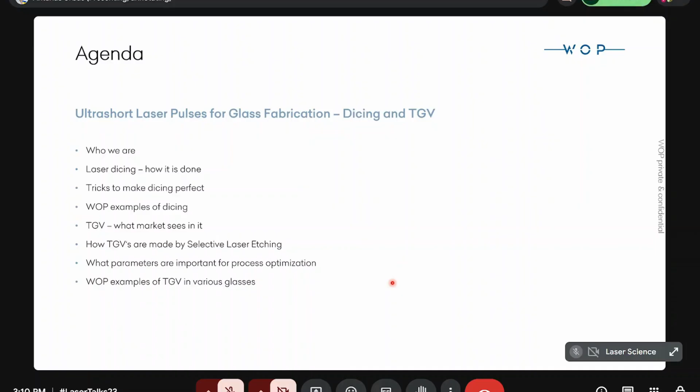TGV, why the market is keen to introduce through glass vias, and why it is important. Just briefly to present how these are made by selective laser etching, because it is the most popular way of doing it these days. What parameters are important for process optimization, and again WOP examples of TGV in various glasses.

So briefly, who we are. As was already presented, we have been working more than 20 years in the field of femtosecond laser micromachining, developing processes and machines which implement these processes. And why femtosecond? It is a very simple answer. No material can withstand a femtosecond laser pulse. We have several patent families. We are roughly 50 professionals, some PhDs, most are Master or Bachelor of Science. And we not only make machines, but also continuously work on research and development together with scientific institutions we are in close contact with.

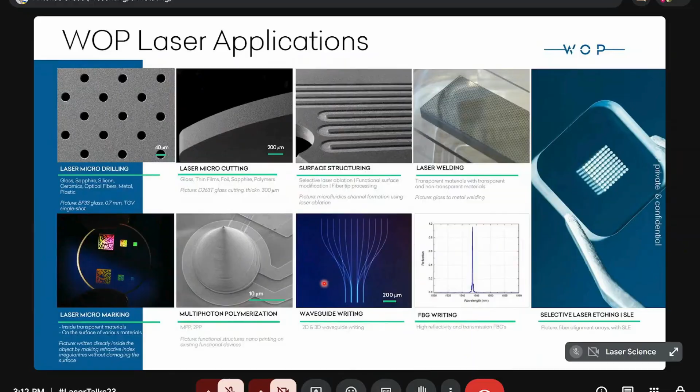What laser applications can we consider? So we are very strong in laser micro drilling, which can be applied to transparent media like glass, sapphire, silicon in this transparency window, ceramics, optical fibers, metal, plastics, whatever. Laser micro cutting, surface structuring, laser welding, laser micromarking, multiphoton polymerization, waveguide writing in 3D shape, and fiber Bragg grating writing.

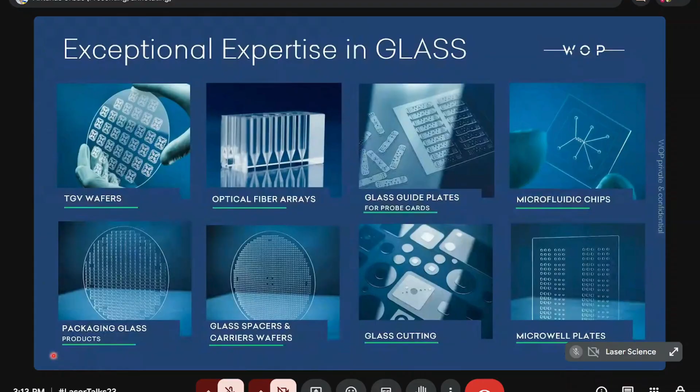As it was mentioned, we have quite big expertise in glass fabrication. So our most recent focus is through glass vias on wafer and panel size. A very popular and demanded thing is optical fiber arrays for positioning fibers in mixed electro-optical devices. We also provide glass guide plates for probe cards, microfluidic chips, packaging glass products, glass spacers, carrier wafers, glass ceramics and whatever cutting, and microwell plates. So it's plenty of applications, we have to say.

Then let's go to our topic. I'll start from dicing. What does glass laser dicing mean? First of all, if we have mechanical dicing by means of diamond blade or diamond wire, it makes quite a wide kerf, which means material loss and quite a high value of chipping on the edges of the kerf.

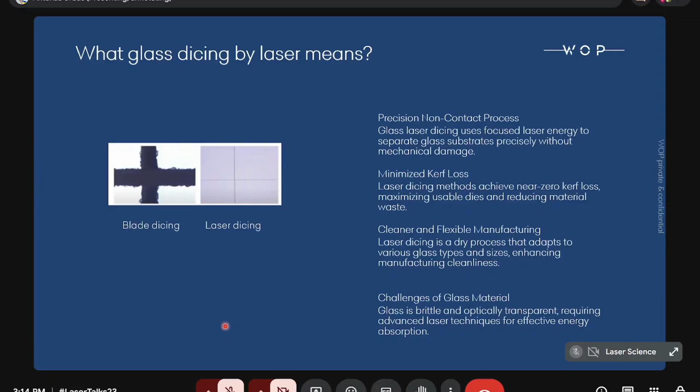Meanwhile, laser dicing, and I have to mention that both these photographs are made with the same magnification, so you can see that it is much more precise and clean. As it is a non-contact process, there's no contamination with debris. It's clean and flexible manufacturing. As you can see, it is a very, very small kerf, meaning you almost lose no material. But of course, if you deal with glass, you have to be careful, taking into account glass material features.

How does it usually happen? Going from the right side to the left side, glass can be separated by ablation from the top side or from the back side. Each of these methods has its advantages and disadvantages, but the main thing in this ablation approach is that you have removed material, which means that there are plenty of particles flying around and settling on the surfaces, and you have to clean it afterwards.

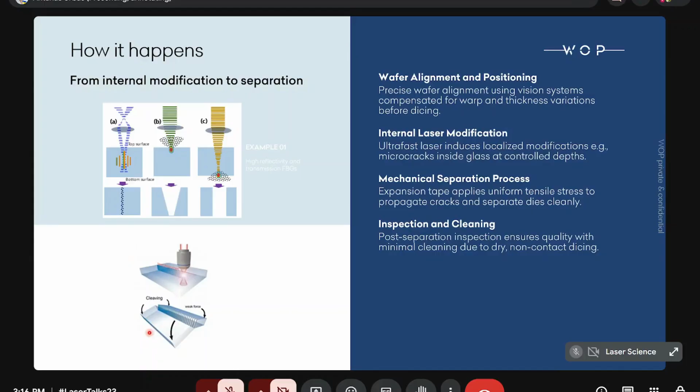If you make this scribing or dicing, whatever you call it, you make a modification in the glass material, and then adding mechanical force, be it bending on a sharp edge or stretch tape, you simply mechanically separate your material along these dicing lines. So again, here you can see the main stages of laser dicing. One thing is to place it very precisely according to the drawing you have. You make internal laser modification and then separate it mechanically.

What are the most popular and most efficient methods to induce modifications for dicing? A quite old method is stealth dicing, as Hamamatsu calls it, which is used by the Disco company. So you introduce damages inside the glass. If it is a thick workpiece, you place multiple scans, and then you simply break along this line.

You can do it in one go in quite big thickness if you use the effect which is called filamentation; it is patented by Rofin-Sinar. What is filamentation? It is a combination of plasma defocusing of the beam, which is focused inside, and the Kerr effect focusing it again. So here you should have many passes to get several damage lines. In a filament, it is made automatically. It is focused, defocused, focused again, defocused again, focused again, and you have a filament, a chain of modifications along the focus line. So it is quite precise, and again you can break after one single scan.

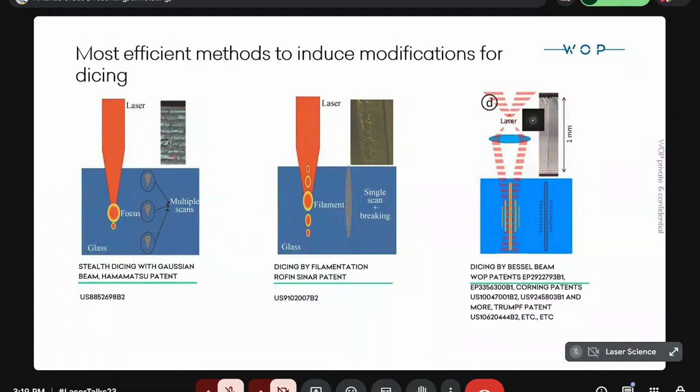Corning has plenty of patents, Trumpf, whoever. Many companies were working on it, and I think it started in 2000 when it became a very popular approach, and now Corning alone has roughly 120-something patents related to Bessel beam application in glass.

So just to tell those who don't know, and to remind those who know it, how the Bessel beam is arranged. In contrast to a Gaussian beam, where the parallel, collimated beam is focused into one single spot, which is very well known, described by the Rayleigh length of the waist and the minimal radius of the focus.

So if you place, instead of a spherical lens, a conical lens, which is popularly called an axicon, it forms a needle, quite a long needle, which can be millimeters, centimeters long, and you just have to adjust its dimensions to your workpiece to get a modification along this line.

So what is important is that this minimum dimension of the Bessel beam is 3-4 times less than you can achieve with the same optics in a Gaussian beam. Meaning that it is no big deal to get a 1 micron thick needle to modify the glass. So you are much more precise than you would be with a Gaussian beam focus.

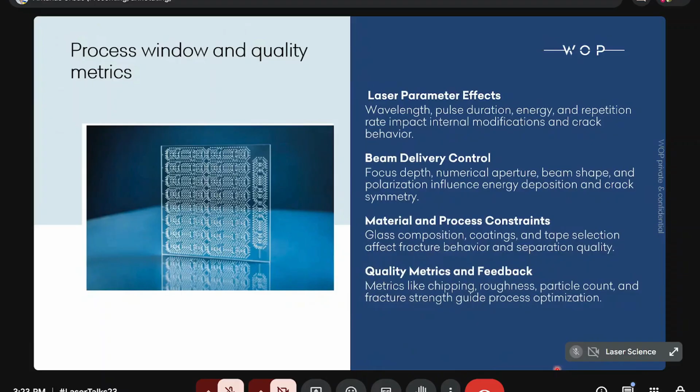As I mentioned, a very important thing is beam shape, which is related to the stress induced in the glass volume. If we place a Bessel beam pulse focus on glass, on the top we can see a very nice, very round spot, which looks very smooth. But if we go a little bit deeper, in this case 200 microns under the top surface, you can see that it is quite irregular, and often it has quite an unpredictable form.

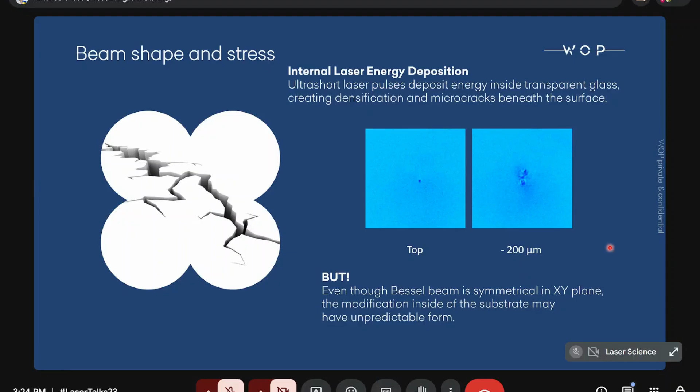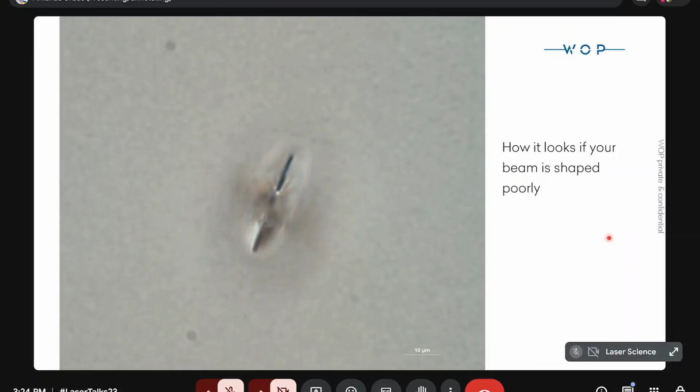And if your beam is shaped poorly, you can see how it looks inside the glass. This video shows you modifications and cracks every 50 microns going down from the top surface. You can see that there are sometimes very well-defined directions of the cracks, but these are not the same at different depths.

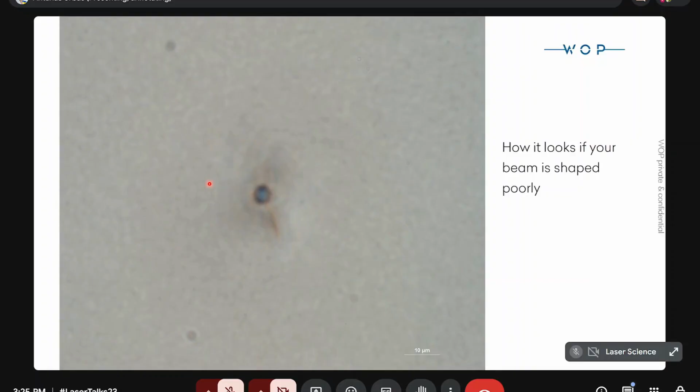And what happens if you try to do dicing with such a badly shaped beam? Surprise, surprise, the cut line cannot be formed because these cracks inside the volume are in very different directions at each spot, and they simply cannot join. This is a line of separate modifications, but no single cutting line.

So what can we do to make the cut line efficient and nice? Again, there are several patents which make this possible. All of them make this modification elongated in the desired direction. It can be done by means of cylindrical optics, by means of phase elements, like in the Corning patent, and we use variable space variant retarders to shape the beam to achieve this elongated form in the damaged area.

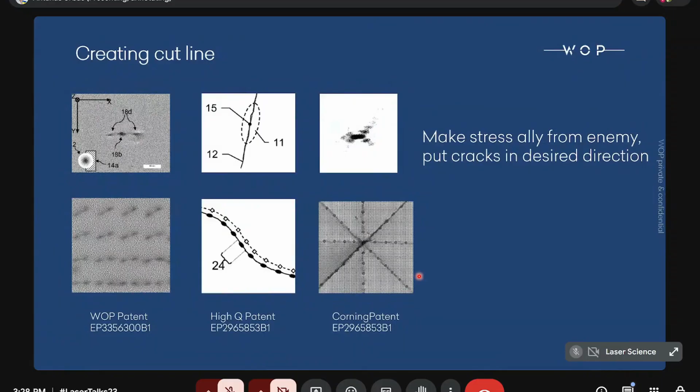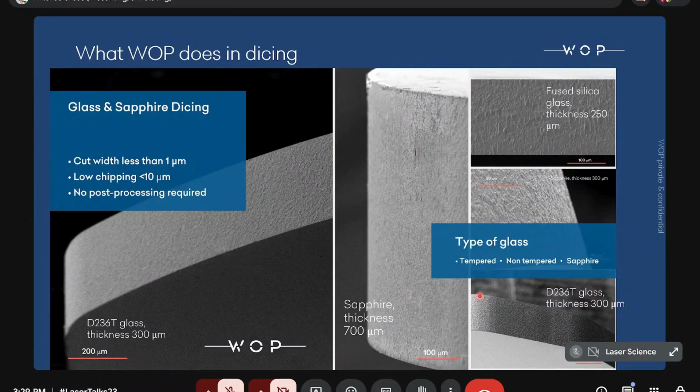Fused silica, again, very nice. Sapphire is not so nice, with a little bit bigger chipping because it is a crystalline material, and the crystal planes pull your cuts a little bit into the material. That's why it is not as clean as glass, but still quite good. And again, our patents relate to tempered, non-tempered glass, sapphire, whatever you want.

And we extended this experience to other materials. The main thing is that the material must be transparent to the laser light. If you remember this forming of the Bessel beam, there are beamlets coming from the cone, from the axicon.

They have to penetrate into material to build this needle, meaning that material must be transparent. So if we work in the transparency window for silicon carbide or coated glass, we can achieve chipping better than 10 microns. Normally it is a couple of microns. We can do it in all shapes, and of course we can tune the dicing process for different thicknesses.

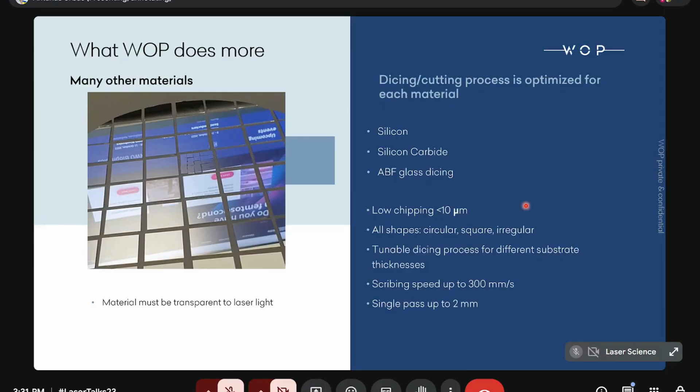Today, we safely work with scribing speed up to 300 millimeters per second, and a single pass can be as deep as 2 millimeters. So, I already saw several questions about dicing, and some answers will come a little bit later. But now, let's go to the second part of our meeting. It is about TGV.

TGV stands for through glass vias. Why it is interesting and where it is expected to be used? So here you can see an ideal view which is created by APECS. It is a European initiative for creating next generation packaging of 3D electronics.

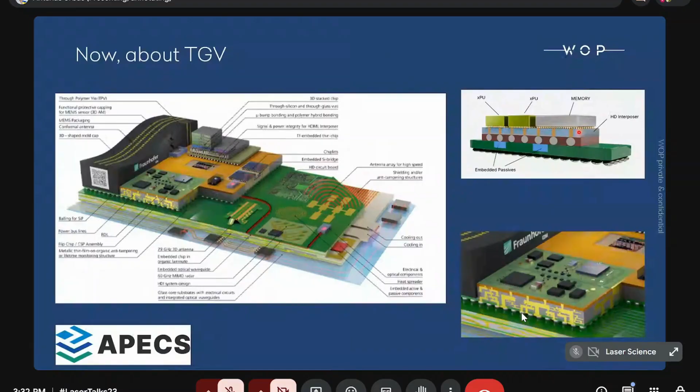So you can see a lot of layers which should be interconnected in the big structures and in the single chip, which is a 3D layered chip, processing unit, memory, and all this connecting to the power and to further elements. And the best interconnect is made through glass, just now.

So again, what is TGV, through glass via? It is an opening in the glass which is filled with conductor, in most cases copper, and it interconnects elements on one side to the other side in the best possible way. So what is it in terms of production? We take glass, we make laser modification, then we go to wet etching. This is the most popular way of creating TGVs in the market today.

Then we check with automated optical inspection and give it to metallization, where a seed layer is set on the surface and inside of the via, and copper is put into the via. Afterwards, of course, it should be removed from surfaces. So we in WOP stop at this stage. We have some kind of optical inspection, which is not really automated.

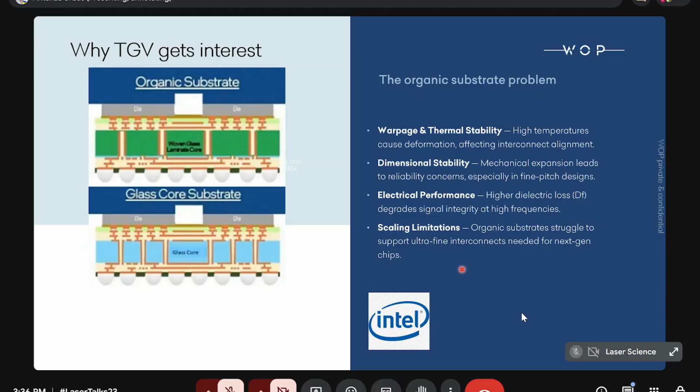Just a small talk about why TGV, why glass. You can see what Intel says about it: organic substrate is not a very flat and not very smooth surface, and it is not very stable in dimensions, because plastic is plastic, you see. And the electric performance is not so good, quite high dielectric losses because of dielectric constants, and it is very well seen at high frequencies, especially talking of 5G and 6G. The loss in the plastic is quite big.

If we use glass instead, what we have is very good flatness of the substrate. It is 100 angstrom, 10 angstrom, whatever you want, just depending on your polishing quality. The electric loss is much lower than in plastic. And you can select glasses which match very well with silicon, meaning that if you place your silicon chip on this glass core substrate, thermal expansion is the same. You don't lose the contact. You don't have bigger electrical losses

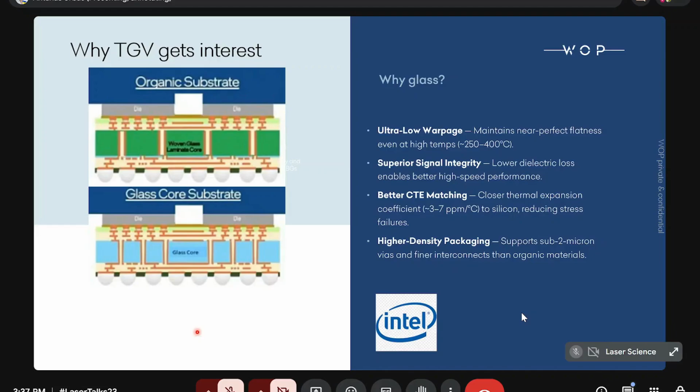in this package. And of course, one very important thing is that glass allows much higher density because of being able to provide a couple of micron wide interconnects between layers.

So if we go to TGV, what is important if you want to go to the market saying, hey, I can make TGV, what will they ask you? As I mentioned, we have to take into account that it will work in the gigahertz range. So the form should be as smooth as possible, meaning that it should be straight, minimal ratio of waist to top and bottom. Top and bottom should be the same. And roundness, perfect is good, but it should be better than 90%. And the roughness of the inner wall should be 150 nanometers or better.

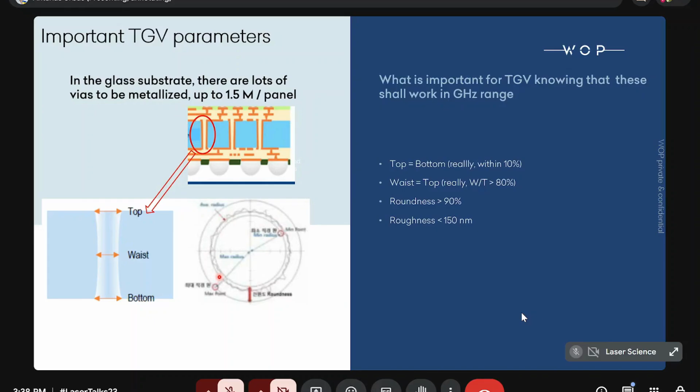So, selective laser etching, as I mentioned, is now the mainstream for making TGVs. It is a two-step process: first creating 3D structures inside transparent materials by means of a femtosecond laser, and then the modified material is selectively removed by chemical etching.

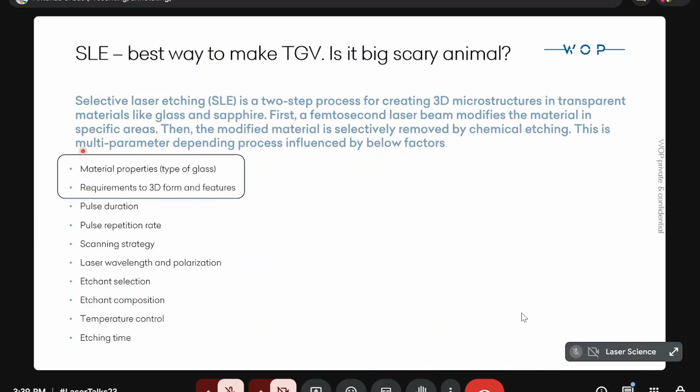It is a multi-parameter process, which starts from the dependency on material properties, meaning if you have borosilicate glass or aluminosilicate glass, alkali or non-alkali glass, it defines these parameters very much. So these are all dependent on which material and what you have to achieve.

Again, this is a two-step fabrication process. And what I have to mention is the selectivity of etching, meaning that the etching speed ratio for laser-modified material and non-modified material should be as high as possible. I had many slides presented, I guess, last year about it, but believe me that it is a very, very complicated process, if you have to select the best optimal window and the particular shape you have to achieve.

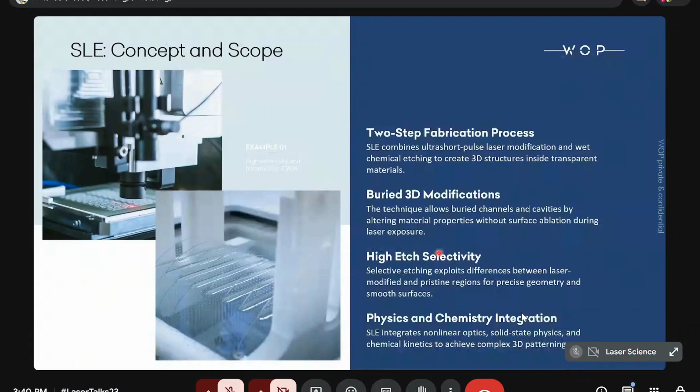So just showing you what is important. If you put too little energy, it might be you don't achieve modification big enough to be etched selectively. Moderate, so you can make modifications that can be efficiently and smoothly etched. If it is a little bit too high, then you can build nanogratings or cracks, which help you in etching, but make your shape irregular and very often unpredictable.

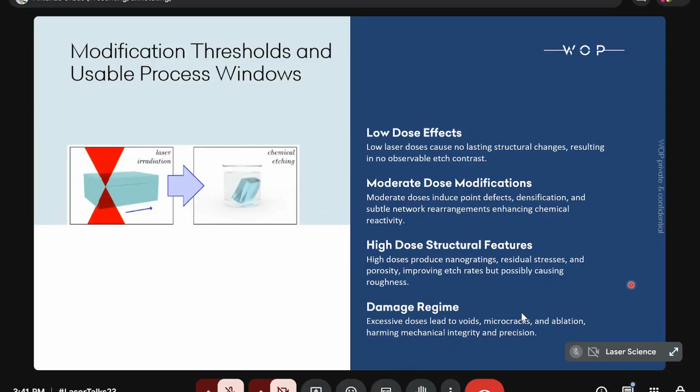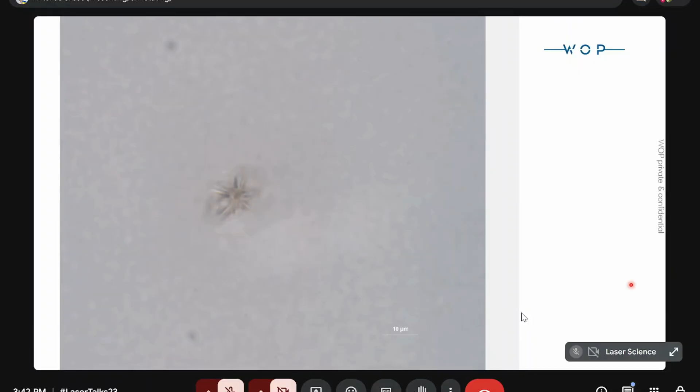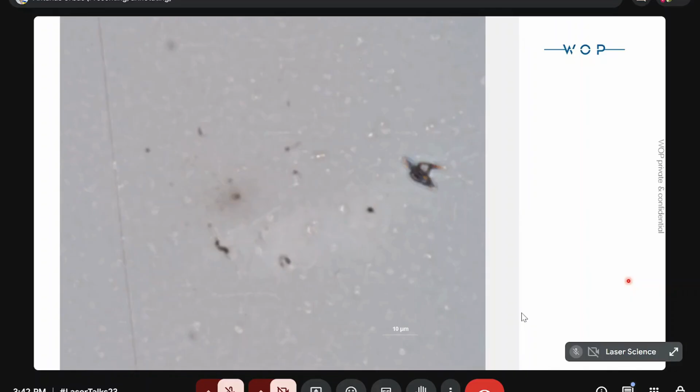So again, compared to what we saw in the bad shaping of the beam, here you can see what we can make with quite proper and very specific shaping of the beam in polarization profile and energy distribution along the beam. You can see that this crack structure inside the volume is not very regular, but it can be considered as being almost the same size along all the path. And this gives us quite good result.

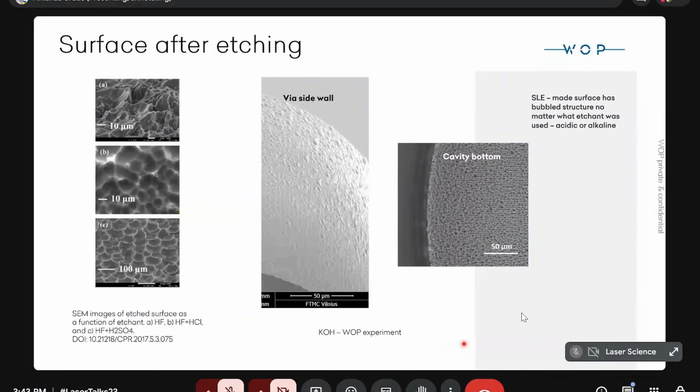So what is important to say, as I mentioned, the people from semicon and especially from electronics ask for very smooth surface. But selective laser etching cannot make the surface very, very smooth, meaning Ra 100 nanometers or something like that. So you can see that regardless of whether it is an acid etched or alkali etched via, the surface has a kind of bubble structure, several microns on the surface.

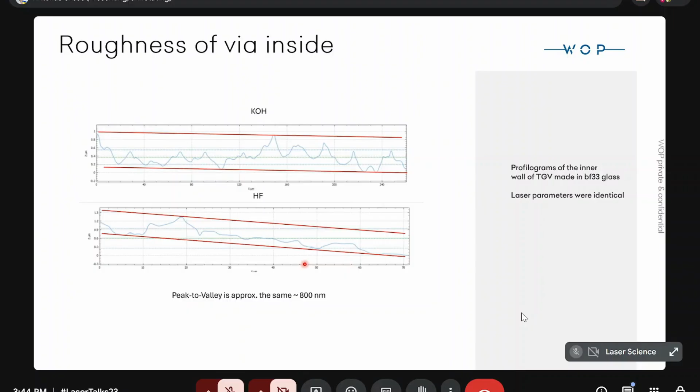Let's see what it is in the depth. So if we look at the side wall, you can see that peak to valley is approximately the same, whether it is KOH or HF etching. It is roughly 800 nanometers. Not perfect, but quite good for the purposes the industry asks from us.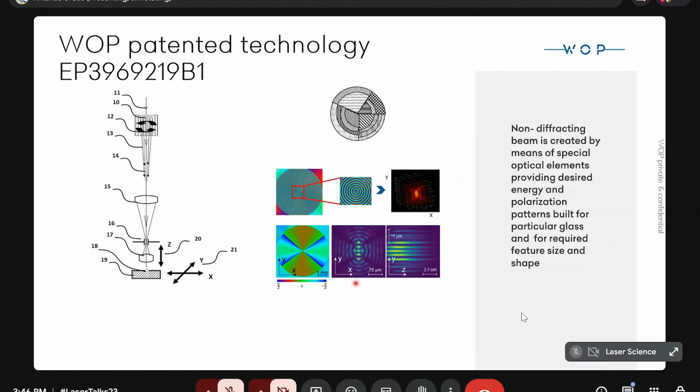If you want to have it even more elongated, you may make the element this kind, and you will have what we call an optical knife. It's quite wide in the Y direction and very narrow in the X direction. You can make very good cuts, and you can imagine that the cracks will propagate in this direction very well. So this is our pattern.

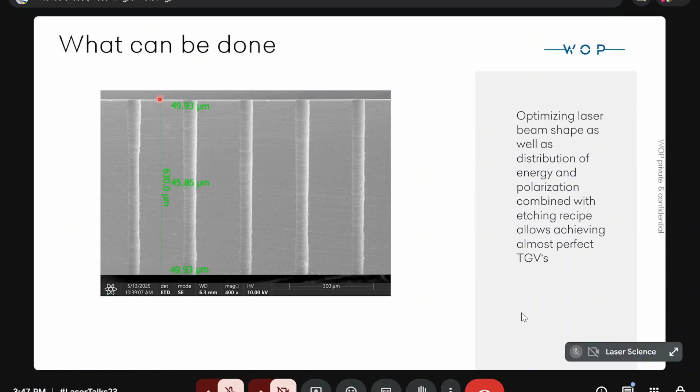Now, about TGVs, which we make by means of our very special optics. This is a photograph of the cuts of the TGVs. These are quite regular, quite uniform, meaning that the waist ratio to top to bottom is 95% or so. And it is over 630 micrometers, which is again quite a popular size of the substrates. So how do we achieve it?

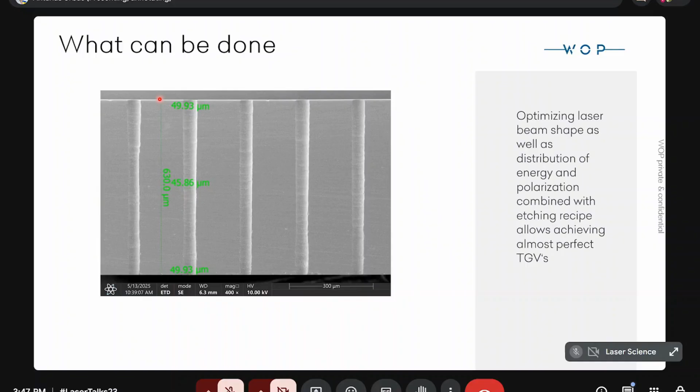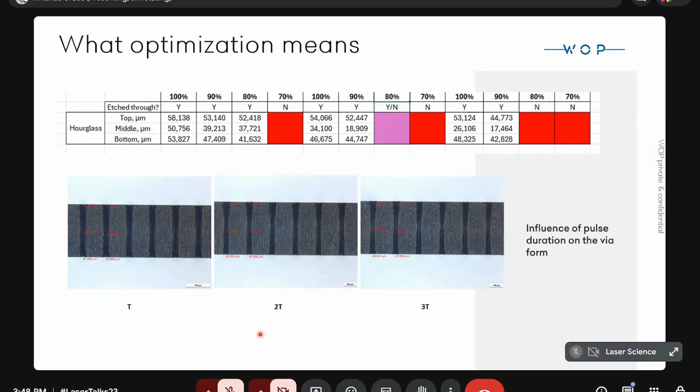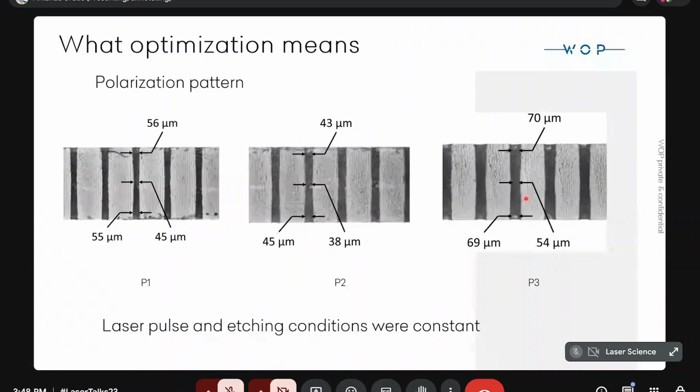Now we can change polarization patterns due to our special elements, and these are results with the same laser pulse parameters and etching conditions kept constant. So you can see that different polarization patterns give you very different results in the shape and size of the via.

And again, a little bit of self-praising. So, I think it was at the show in Taiwan, people said that our vias are the best quality. They say, we believe.

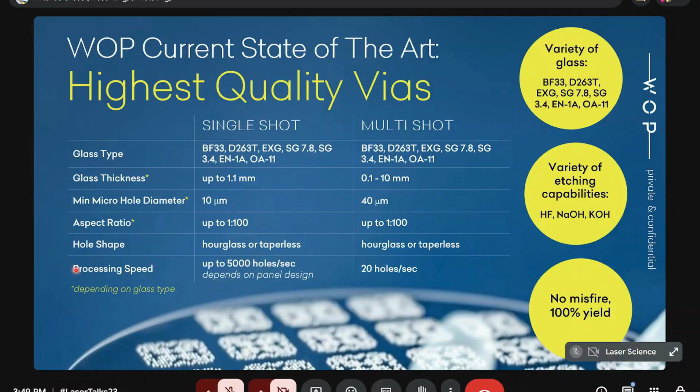So you can see quite a big variety of glasses we work with, and all of them are considered very good candidates for glass core in the semiconductor industry. These vias were etched in alkali etchants and in acid etchants, and what is important, we can ensure that no bad vias appear across the whole working area. You can see the parameters we can provide. And here are some examples of how these vias can look.

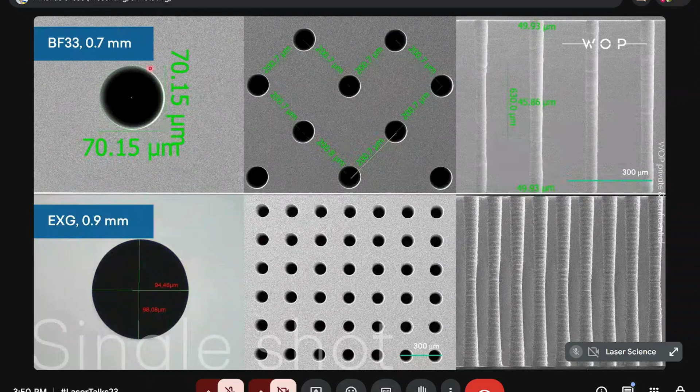BF33 Borofloat is, I think, the best glass for making vias. You can see a very regular shape, very uniform along the depth. EXG aluminosilicate non-alkali glass is not so nice. If you see the cross section of the via, it is a little bit elliptical, more sensitive, but it is very hard to get roundness of 98%. Here, let's say, it is 100%. It is such a hard glass, but we can handle it as well.

And now we are already preparing; we have an in-house machine which can handle, oh, sorry, it is 510 millimeters, not 5 meters, glass panels. And probably in early autumn we will be ready to supply the first machines to customers.

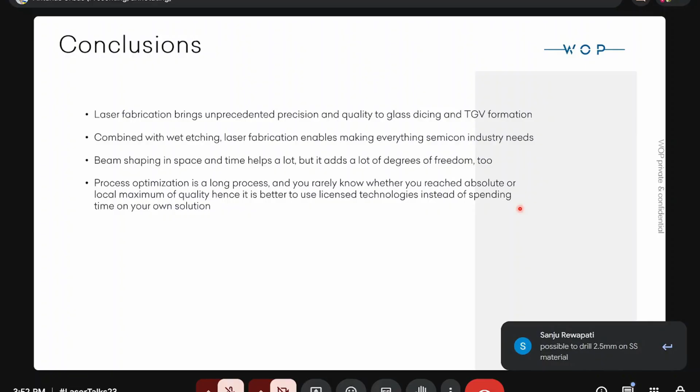So, okay, I left some time for questions, luckily. So just small conclusions: laser fabrication, as you see, brings precision and quality to glass dicing and TGV formation. And combined with wet etching, laser fabrication enables you to make whatever you want and whatever the industry needs.

It is worth mentioning that beam shaping in space and time helps a lot, but it adds a lot of degrees of freedom. So you have to plan very carefully what you want to achieve, and you have to know very well what changes if you change this and that parameter. That's why process optimization for a multi-parameter process is quite a long deal, and you don't always know whether you reach the absolute or a local maximum of quality. So my cordial suggestion is to take licensed technologies if you don't have the time and personnel to do it on your own.